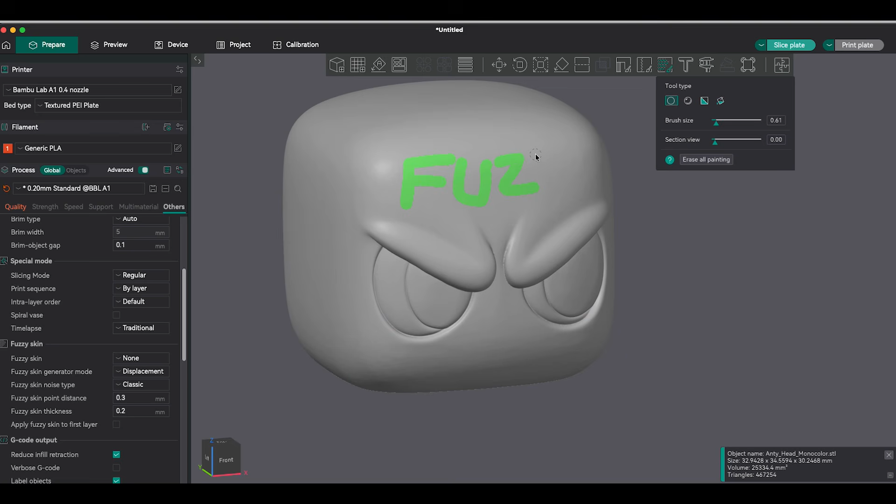Do you know that you can 3D print without the layer lines? You can print with different textures, more or less definition, customize, paint the areas that you want, and the best part, all of that inside the slicer, and it's super easy to do.

And for that, we're gonna be using Fuzzy Skin, which is a feature inside the slicer that allows you to print in an irregular way, making your prints more matte, rougher, but it's perfect to hide those small imperfections that we get in 3D printing. In this video, I'm going to explain what Fuzzy Skin is, the ways you can use it, and if it's worth it or not. All of that hassle-free, and I promise you can do it even if you're a beginner.

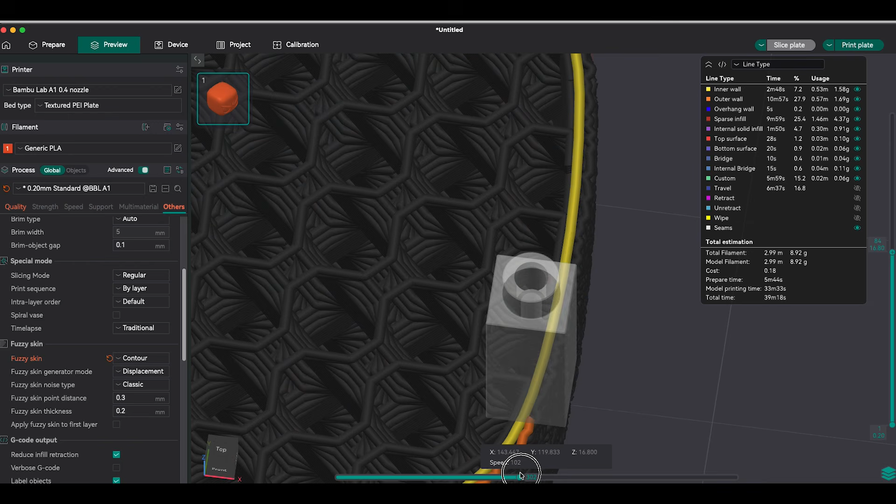Let's go. So Fuzzy Skin is a function inside the slicer that messes up the path of your G-code, but on purpose, with an intention. So instead of actually doing the contour as it's supposed to, it creates that little noise around, creating that rough aspect that, if you put layer on top of layer, creates this really different surface that in my opinion adds a lot of value in a lot of different situations, and I've already done videos talking about it.

So as a result, you get this rough and matte finish. But on the high side, it also hides completely the layer lines and the Z-seam. This is why a lot of people are gravitating towards this technique, to use this aspect to enhance the quality and the style of their prints.

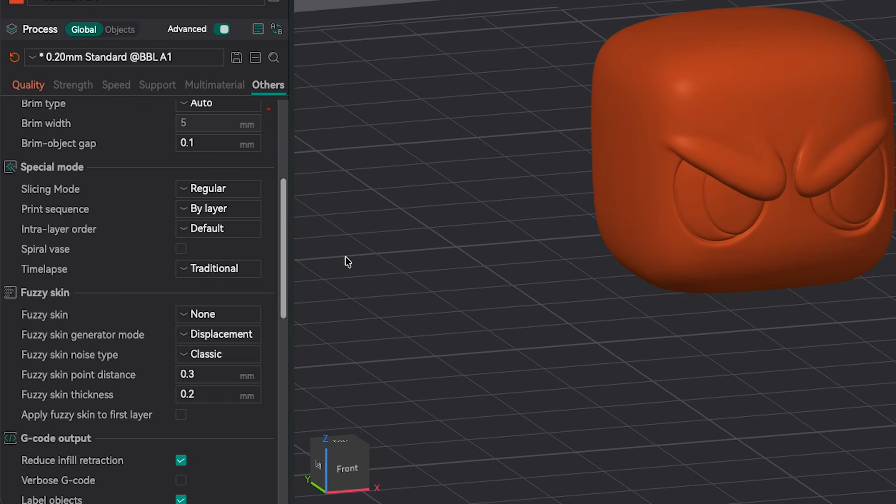And how can you apply the Fuzzy Skin? So on Orca Slicer and all the variations of Orca Slicer, like Bambu Studio, Creality Print, you can find the Fuzzy Skin option under the Others tab. There's a little special area, and this is where the Fuzzy Skin is usually located. And usually you have 4 different ways to apply this. The None, which is not going to apply any Fuzzy Skin at all, but allows you to paint areas in which you want the Fuzzy Skin to be applied. But I'm going to get into that in a little bit.

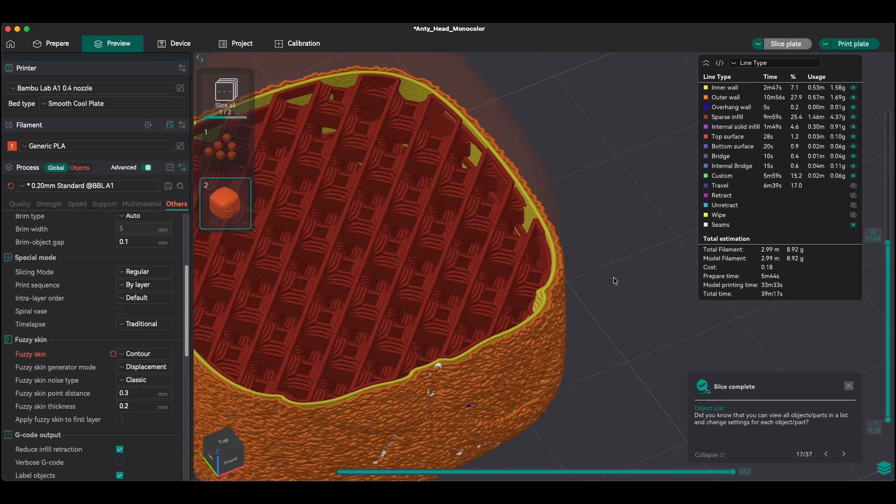The Contour, which is the most common mode, which only applies the Fuzzy Skin on the outermost walls of your model, so it's not going to apply any difference in the texture inside of your model. Usually when we have connections or when we just want the outer side to be with the Fuzzy Skin, this is the one that we use, and to be honest, it is the most common use of it as well.

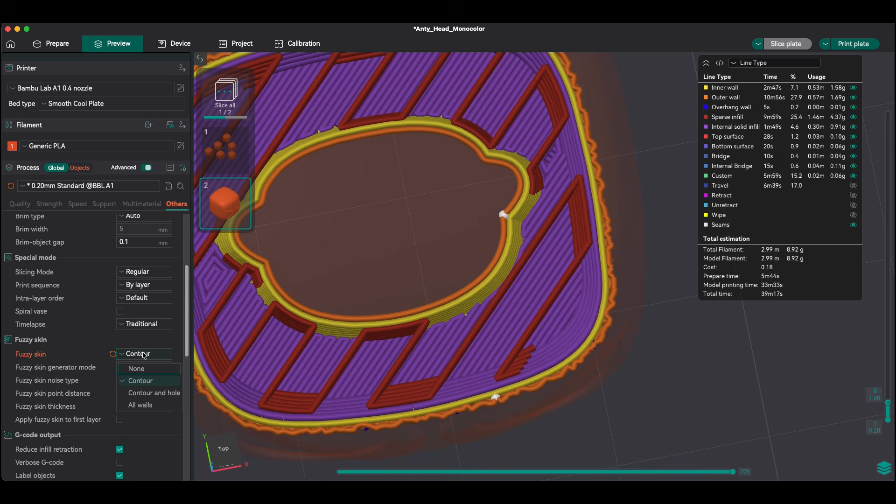The third option is Contour and Holes, and here it's going to apply not only on the outermost walls, but also in the holes that you're gonna have in your model. So every full perimeter that we have is gonna come with Fuzzy Skin applied. And this is very useful if your holes are apparent and you want them to have the same texture, or if you just want the whole thing to kind of look the same.

But this can be kind of dangerous, especially if you have connectors or if you need to make your model fit inside one another. Then it's going to change the inner dimension of the model. It's going to change a little bit the gaps that you have planned, and then you might end up with a model that is flawed, that is not going to work really well.

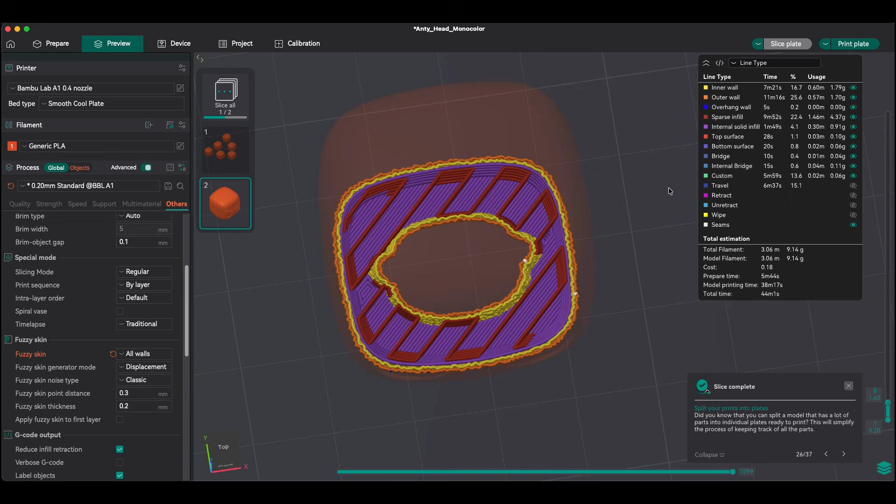And then we have the most intense of all, which is All Walls. And with that, all the print gets the Fuzzy Skin applied, inside and outside, and the texture gets stronger as well. But on the downside, your print gets slower, it can affect the resistance of the model, and it will affect the gaps and tolerances that you have designed. So only use it if you really know what you're doing and you want a desired effect. To be honest, it's an option that I don't even remember if I've ever used.

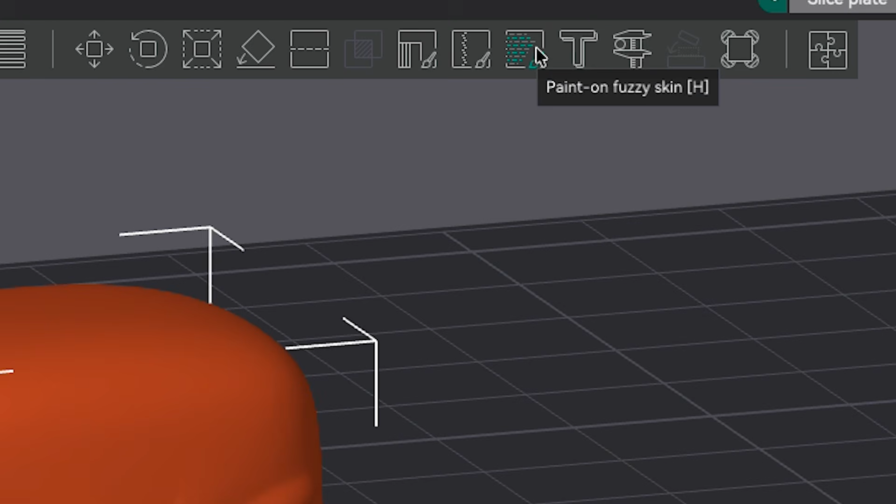You also have the possibility to pick where you want to apply your Fuzzy Skin. And for that, you can use a feature called Paint-on Fuzzy Skin. You click on this little icon that almost looks like a brick wall with a paintbrush, or alternatively you can just press H as a shortcut. And from that point on, it's pretty much just like painting a color as you would on a colored model. And in order to make the region that you painted work, you gotta pick the None option, as I mentioned before.

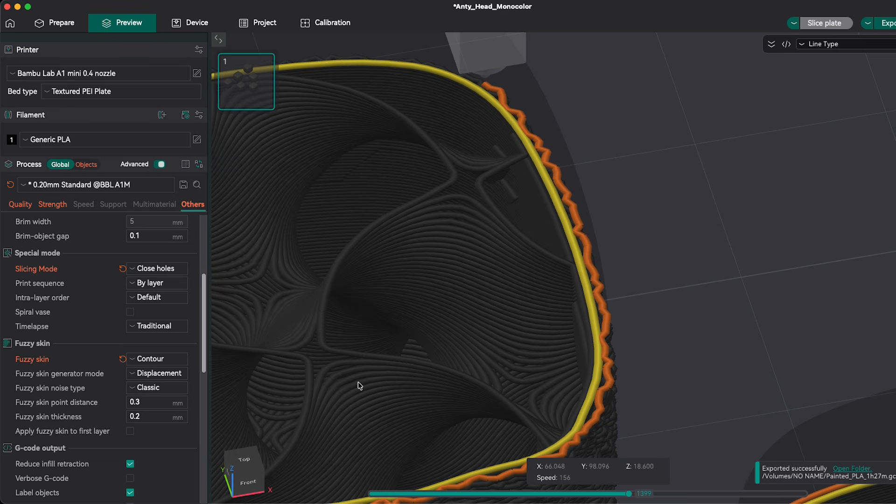Now we go to the second thing, which is how is the Fuzzy Skin even generated? And here we also have 3 different options. The first one is the Displacement, and this is the OG Fuzzy Skin, if you can even call it like that. So with that, your nozzle literally trembles around, going inside and outside the wall, kind of interfering with the original path from one side to the other really fast.

The result, a very visible texture, a really rough print, but that hides really well layer lines and the Z-seam. However, you do need to pay attention because your print will get slower because the nozzle is moving from one side to the other, so you don't get as much acceleration as you would if you haven't applied the Fuzzy Skin. As a consequence, it generates a lot more stress to your printer, so make sure that everything's well calibrated and that you're doing your maintenance really well as well. But it does make a very cool effect.

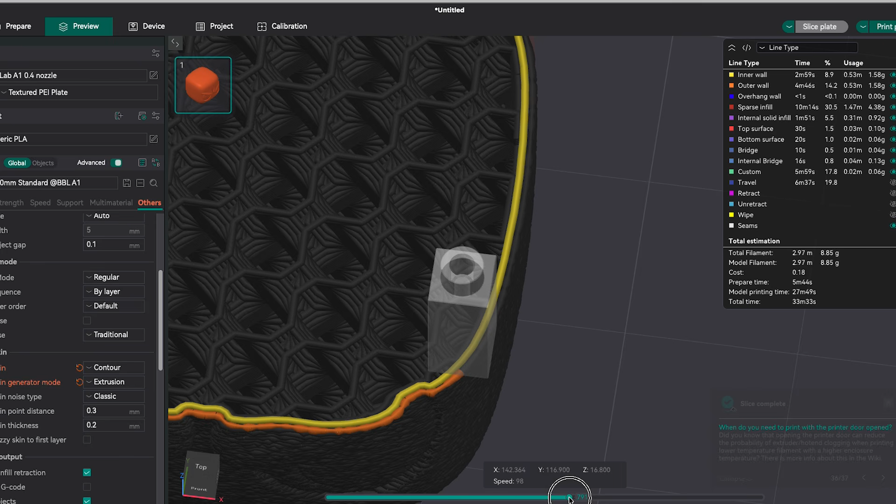And now let's go to mode number 2, which is the extrusion. So in here, what changes is not the path in which your nozzle is going, but the amount of plastic being extruded. A little bit more, a little bit less, creating the effect of the rougher surface. The result is a slightly less rough surface than you would get on the displacement mode, and it can generate some small tiny holes on your models, especially if your filament is not properly stored.

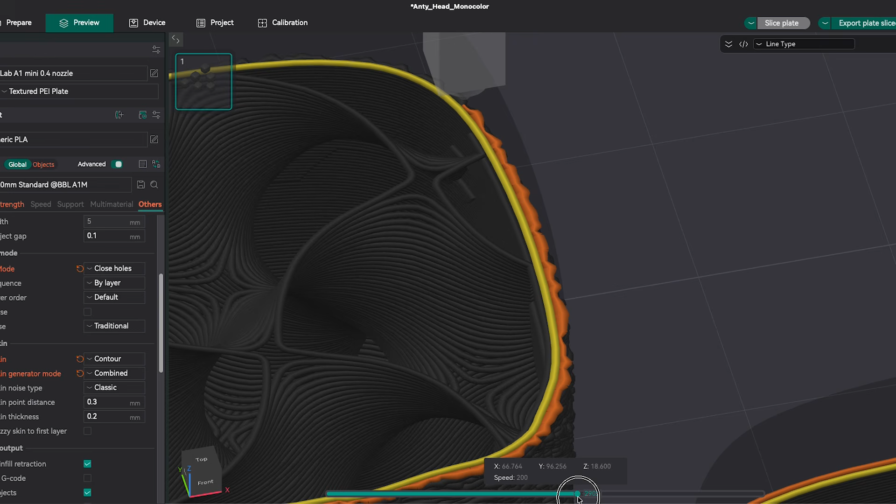And then we have mode number 3, which is called combined. As you might imagine, it's a combination of the displacement and the extrusion. A little bit of variation in the path, a little bit of extrusion variation. The result is a nice texture, a lot less stress on your printer, and to be honest, this one is my preferred method. It changes a little bit the path, it changes a little bit the extrusion, you get a cool effect, and you don't overcompensate on either one of these two, the path or the extrusion.

And then you also have 5 different noise types for your fuzzy skin, which is cool as well. The first one is the classic, which is total random, and it's perfect to hide the layer lines. Perlin is a little bit more organic, smoother, and more natural. Billow, which is the cuter and softer surface that groups a little bit the forms together. Ridged, which is more aggressive and resembles a little bit a rock, a stone, something rougher as well.

And last but not least, we have the Voronoi, which is already kind of like a classic in 3D printing. It gives you more of a scale or a mosaic. In my opinion, it does look like the Thing from Fantastic Four a little bit, and this is what you get with the Voronoi. But for me, the Ridged, the Perlin, and the Billow, they are very similar. They don't vary too much from one another. The Classic is more of a smooth version of these 3, and Voronoi is the strongest.

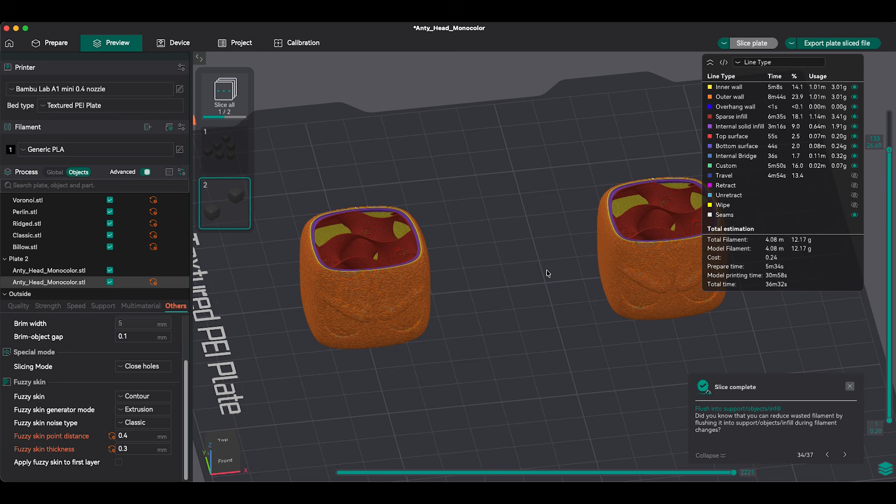So now let's talk a little bit about the settings, because you don't need to mess too much in order to get a good result. All you gotta do is be very intentional and tweak the settings that actually make a difference. And the first one is fuzzy skin point distance. The bigger the point distance, it's as if you have less points on this perimeter, so your wobbles, your waves are gonna get longer and further from one another, creating a rougher texture. The smaller you get this number, the finer this texture is gonna be, closer they're gonna be from one another.

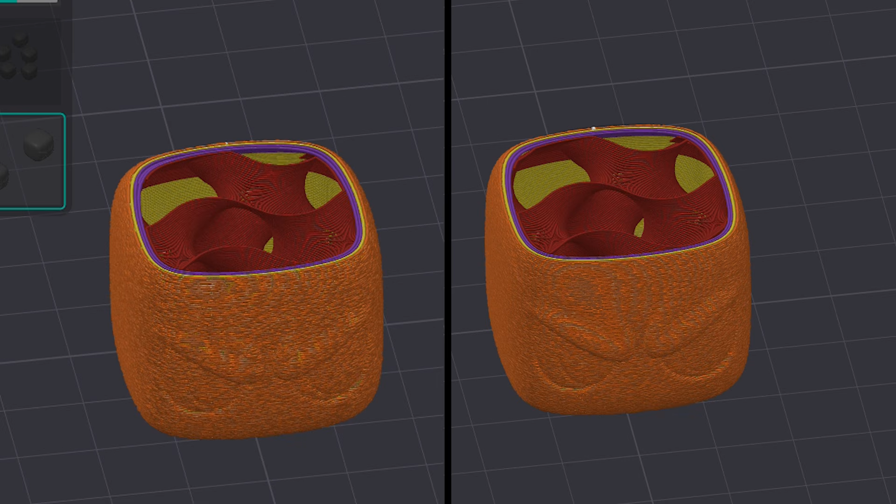So this is not how wide your texture is going to be. It's not how far you are going to go outside of that original path or how much more filament you're extruding. What this actually changes is how many of these points of interference you're creating. So the more you create, the finer and less rough it gets, kind of like a detailed texture, and the less you create, you get more of a rougher and less detailed texture.

What I usually do here is I select that object, I duplicate it, and then I change per object and try a few different variations in here. You're able to see really well in the G-code what the final texture is gonna be like. So test a few different options and see which ones you like the most.

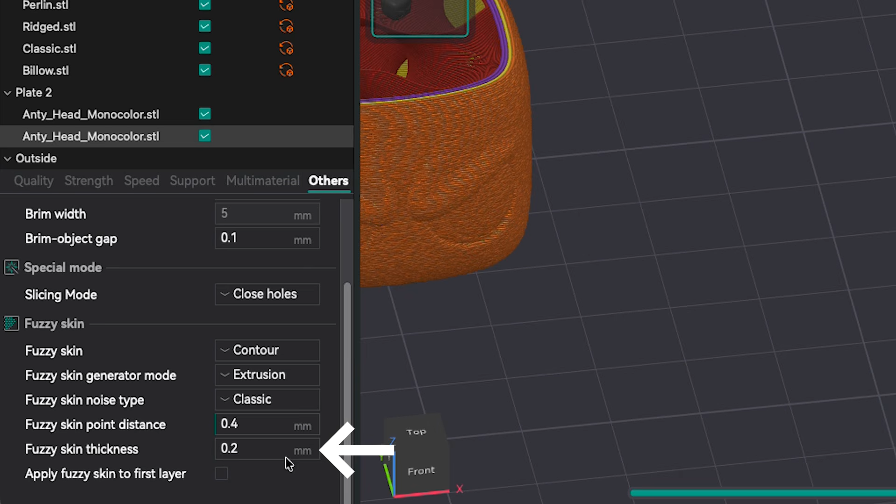And this next one, which is the fuzzy skin thickness, really tells how much you are deviating from the original object. So it really defines how much the texture is popping outside your original models. And my rule of thumb here, don't overdo it. With a 0.4 nozzle, something between 0.2 and 0.3 works really well.

If you put a smaller value at one point, the slicer is not going to slice at all, which makes sense because the deviation is too small. If you put a value much bigger than this, the slicer is gonna stop you, and it makes sense because if you put this number too high, you're going to completely destroy your design and it's not gonna be worth it at all.

But it's really up to you to decide, test which one you think you like the most, and comment down below which is the setting that you are using on fuzzy skin distance and thickness.

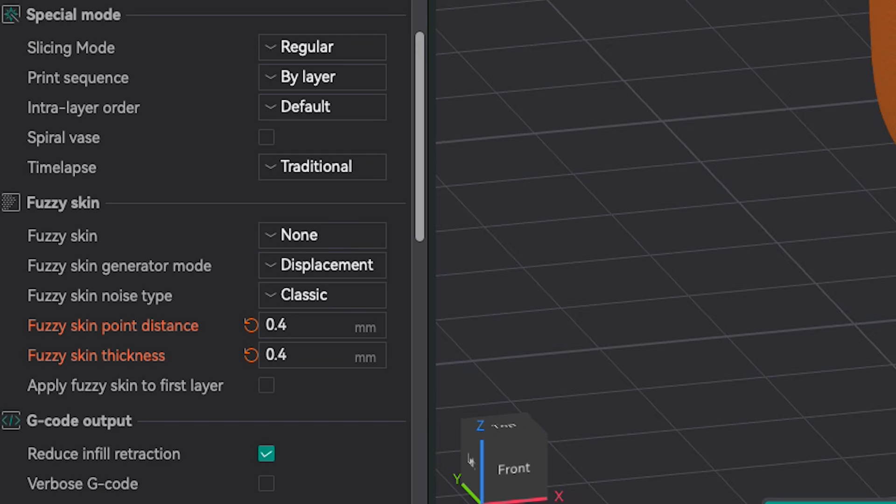If you keep on scrolling down, you see that you have the option to either apply it or not on the first layer. My take, it's not gonna change too much. Don't apply it. Make sure that your first layer is your first layer configuration. This is something that I always tell and I keep telling. Your first layer is sacred. Regardless of what you change on your settings, change from the second layer on. Then it's fine. Your first layer is what ensures that you have a proper base for your entire print.

So don't change it. Now let's talk a little bit about the different applications, when to use and when not to use the fuzzy skin. The first and most important application is to hide the layer lines. This is the most common use, and in the majority of the cases, applying the fuzzy skin does make your layer lines completely invisible. It's harder to distinguish them because you have a lot more information going on the surface of your object.

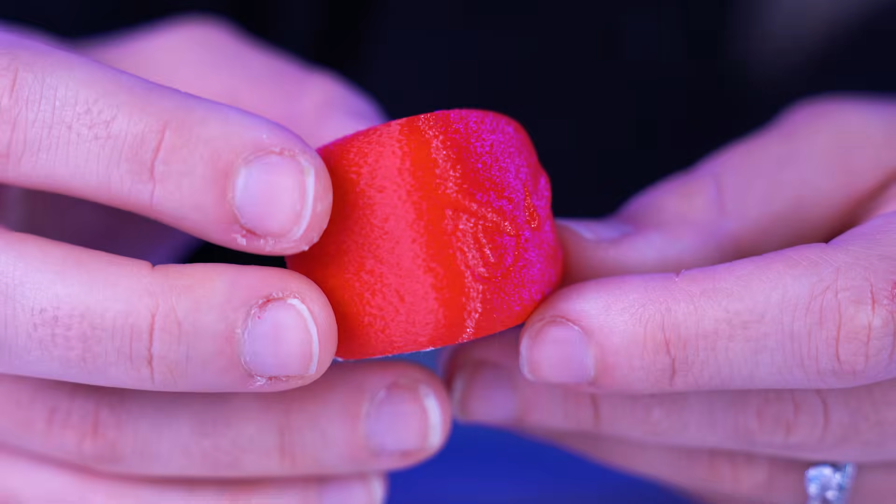The second one is simple as well because it makes it look good, especially for home decor items. A lot of people prefer that matte, rougher finish that does not give a 3D printed look. And for those applications, the fuzzy skin is really good because you apply it, even if you do like a very subtle texture, it still gives you a completely different style of surface. So people don't automatically associate it with something 3D printed.

For home decor items, this is really good and it can help you boost the perceived value of the printed product. It makes it look a lot more like clay, like a stone. And these products, they are usually more expensive. They're usually handcrafted, so they tend to value a little bit more than a 3D printed product. So when you apply the fuzzy skin and you get that same feeling, this is what transforms the perceived value of your print and makes your product feel a bit more premium.

And when are you not supposed to use the fuzzy skin at all? Well, you should absolutely avoid using fuzzy skin for technical prints. Prints that you do need to make them fit, prints that you do need to have a proper dimension, because it will alter your dimensions. It will alter your tolerances. Things are not gonna fit, things are not gonna click. If you need them to fit on a determined space, it's not going to work.

So even if you think it's not gonna change too much, it's not altering too much, try it out, but I highly do not recommend you to use it, especially because in these models, the aesthetics is not as important as its functionality. So it does not make sense for you to add something that adds to the aesthetic but compromises on the dimension and the precision of what you're printing. So anything that you need to click, that needs to rotate, that needs to fit, or even if you need a fast print, because all of these things do alter your final time.

Imagine the first one, that when you have the deviation from the original path, as I said before, you are not going to be having the same acceleration that you would on a regular print because you're going to be going from one side to the other. So the printer cannot reach the exact same speed, even if you set your print to go on that speed. It's not gonna happen. Acceleration is not there. It will make your print slower.